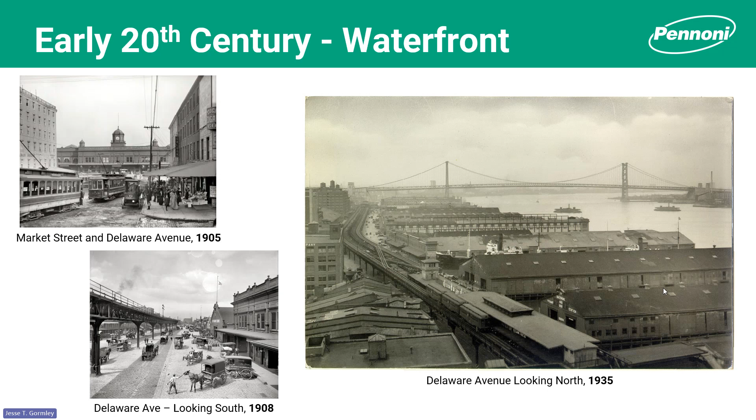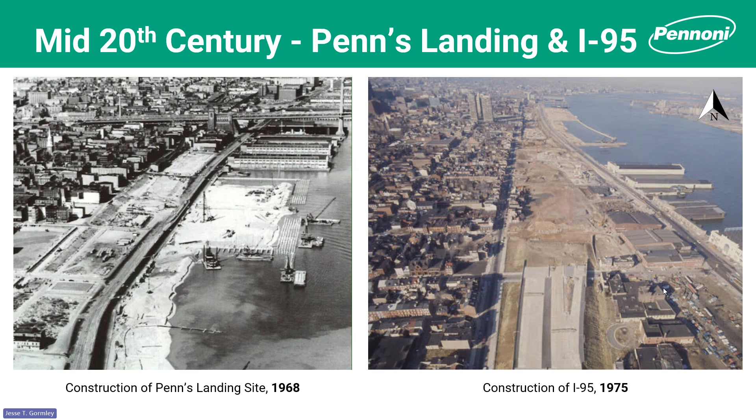Fast forward to what we're calling the existing condition. It's in quotes because the whole site on the left, the Penn's Landing many of us have known and loved for the last 50 years or so, is now demolished. Construction is underway for the new structures that we're going to be showing you. But we thought it was an important capture of the infrastructure that was out there.

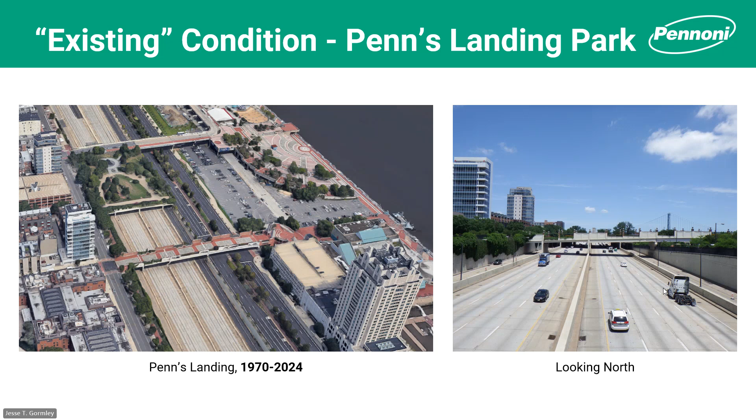And from here, we'll pivot to 2011. In the middle of that window, while the existing park spanned over 95, while there were some pedestrian bridges there, still there was a grander vision launched as the master plan for the Central Delaware to improve and develop this area, try to increase access and bring people back to the waterfront.

And the part I think is most impressive about this whole thing is the stick-to-itiveness that has gone with this vision. You see 4 elements called out here that were addressed as part of the I-95 CAP project. We're going to focus on that one highlighted in green, the Penn's Landing Park, today. But the fact that a plan developed nearly 15 years ago is actually coming to reality now, I think is highly impressive.

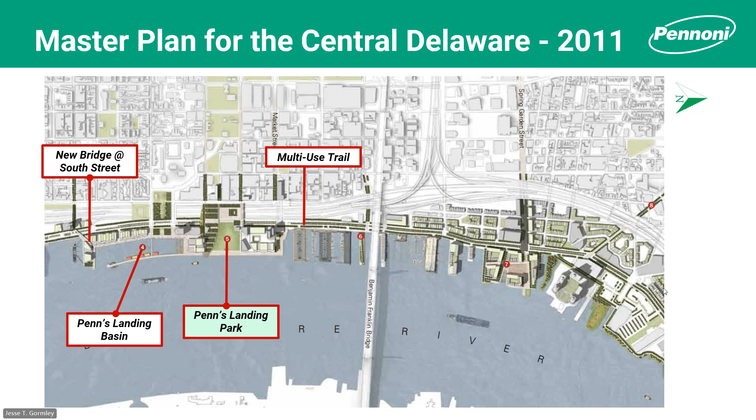In terms of project goals, there were many, and you see the long form version of them here. I bolded the ones that we're going to address most directly with the presentation today. Numbers 5 and 6 really focus on the South Street pedestrian bridge, which I will show a photo of. I'm hoping you will get to see other presentations on that in the future, but it won't be a focal point of today's presentation.

And the goals for us revolved around increasing access to the waterfront from the city, doing that by creating an inviting, open public space with landscaping that would bring people and make them want to come in to the new park space, as well as improve the visual connection to the river from Front Street. And I'll show you a graphic in a minute clarifying that one. And that last goal on the bottom was something that everybody carried throughout all the work we did. We wanted to be sure we were considering flexibility for future development and improvement in this area, both along 95 and along the Christopher Columbus Boulevard stretch.

Oh, before I move on from this, the figure on the right comes out of PennDOT's Publication 10A. I'm sure many of you are familiar with it, but we've been flashing this on screen when we get a chance because it's a great representation of what that community involvement process is supposed to be like through both planning as well as engineering and even into construction. And again, the project team is very proud of the level of input we were able to get, the community involvement that we had.

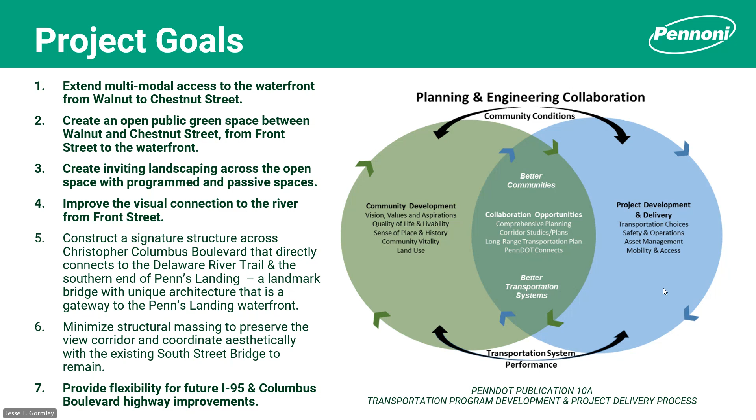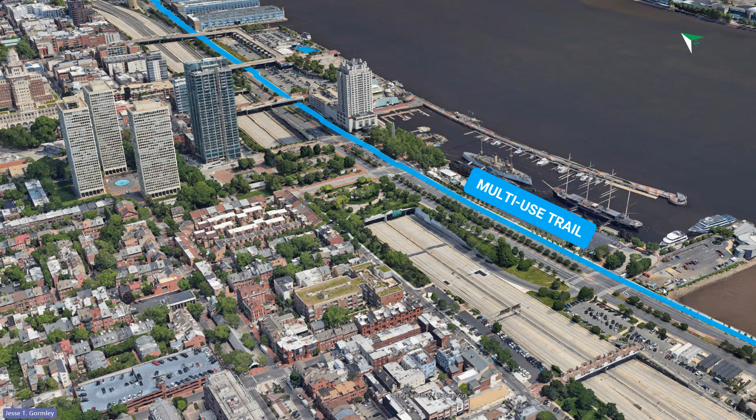All right, to provide another overview, here's an aerial of that project site I showed boxed out earlier. I mentioned there's a multi-use trail passing along the edge of the Delaware. That is the Delaware River Trail. I'm going to give a shout out to NV5, who really led the design on that element. Much of it is constructed, but the tie-ins to some of the new infrastructure going in, the South Street Bridge and the new cap structure bridge, are yet to be completed.

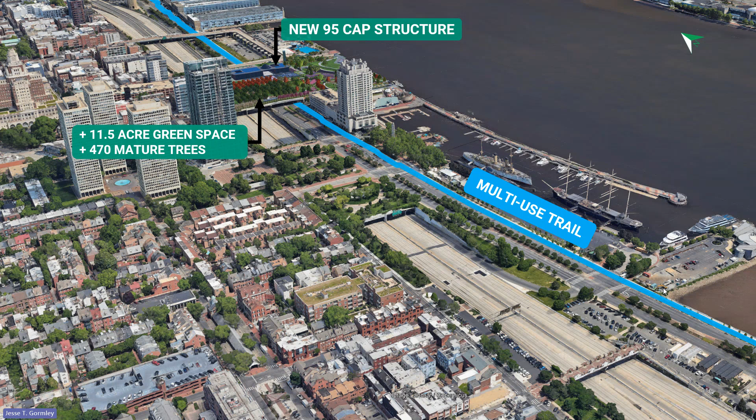Obviously, our focal point for today, the new I-95 cap bridge and other structures. That's what we focused on in this presentation, but it is the largest aspect of the project, I think. It was because it is the focal point around a lot of this other work. 11.5 acres of total green space, 470 mature trees going on top. It's a large structure.

I also mentioned the South Street Bridge. I'll show another rendering of this in a moment because it's a beautiful structure, proposed to serve as a gateway to the whole area. And then several other aspects of the project, not really represented in this graphic, but as mentioned, access was key. So we're extending multimodal access to the river through the park space, but also through coordination with SEPTA and what transit routes they have leading to this area, coordinating with the city for the bicycle network, being sure there's other opportunities to get here.

Streetscape and traffic calming measures taken especially along Front Street, again, to try to create an inviting access front door to the park, if you will. Traffic signal enhancements throughout, especially along Columbus Boulevard, and then improvements in traffic management system ITS work along I-95.

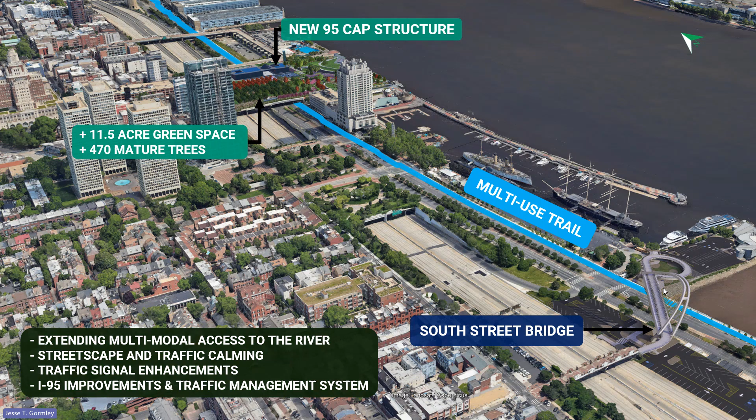Here's that rendering of the South Street Bridge, a really, really cool asymmetric tied arch structure. WSP led design for this, a great teammate, and I'm optimistic, like I said, that you'll get other presentations by them on this structure in the near future.

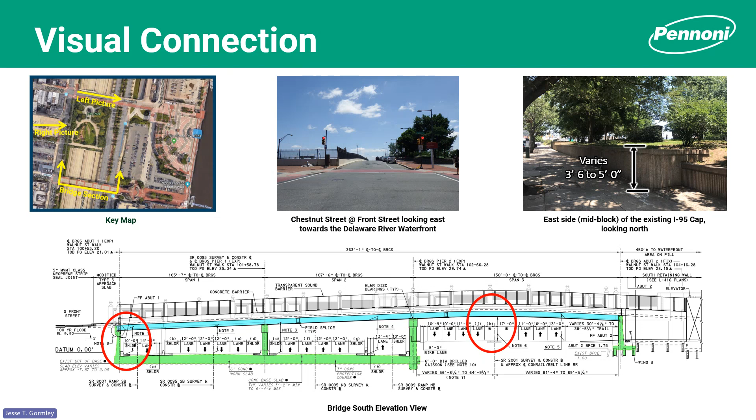Down bottom is a cross section of the bridge. It's actually the south elevation, and you can see 2 red circles. Those were vertical clearance controlling points for us. Obviously, there's some challenge in both restoring that visual connection, trying to keep the bridge profile low, while also meeting those vertical clearance requirements. But I think we rose to the challenge. Again, John will tell you more about the superstructure and how that design went.

Good. So I'm going to focus on the bridge structure, the components, basically all the stuff that you can't see when you're on that beautiful landscape structure, but all the stuff that we as engineers appreciate.

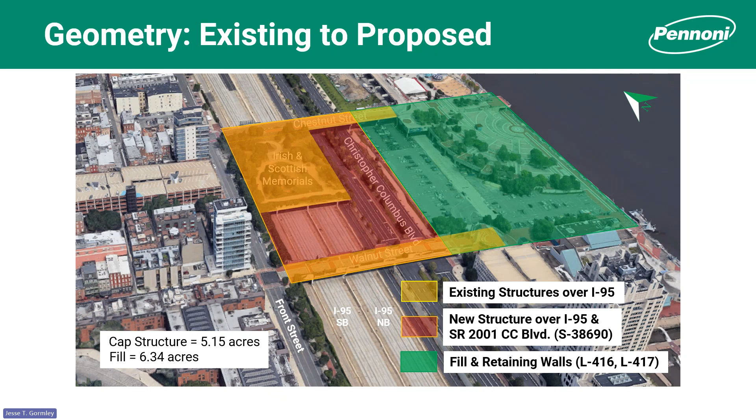Again, this is comparing existing to proposed cross sections. The wide portion of the existing structure was a park and also Chestnut Street, approximately 374 feet. And then there was another pedestrian bridge, Walnut Walk. All that coming out and now being one continuous 614-foot wide structure consisting of steel I-girders. I'll get more into the specifics of that later.

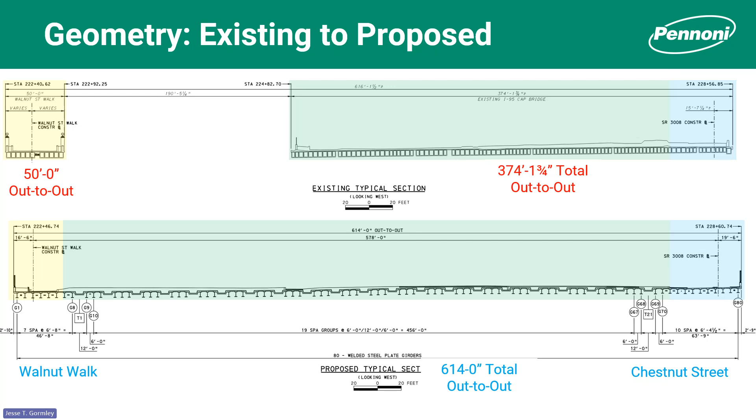Again, another comparison between existing and proposed structures. You see here the existing box girder bridge with 4 spans altogether over I-95, but not over Delaware Avenue. The new structure is going to extend over Delaware Ave, which is now Columbus Boulevard. So it was 209.5 feet previously, and now approximately 363 feet long.

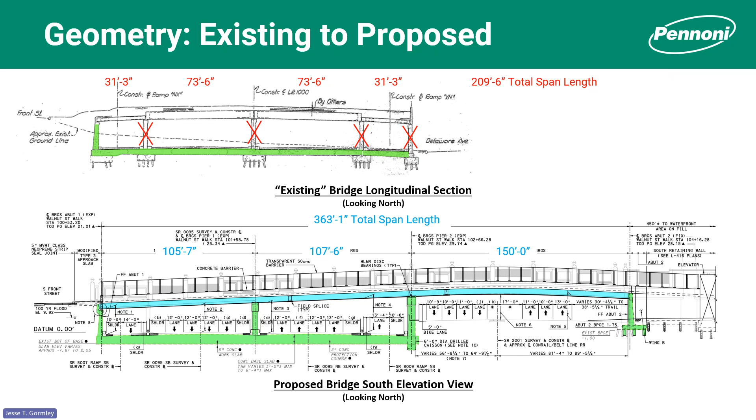These piers and abutment / pier, if you want to call it that, are all coming out. And the base slab here and abutment 1 are going to remain, whereas abutment 1 will be modified. So eliminating the 2 piers in the middle helped with lane arrangements for I-95. The existing base slab, which was a very thick concrete slab underneath I-95, was preserved as much as possible in building this new structure. And also, we found that there were some existing unknown foundations underneath all of that too, as we progressed drilling operations.

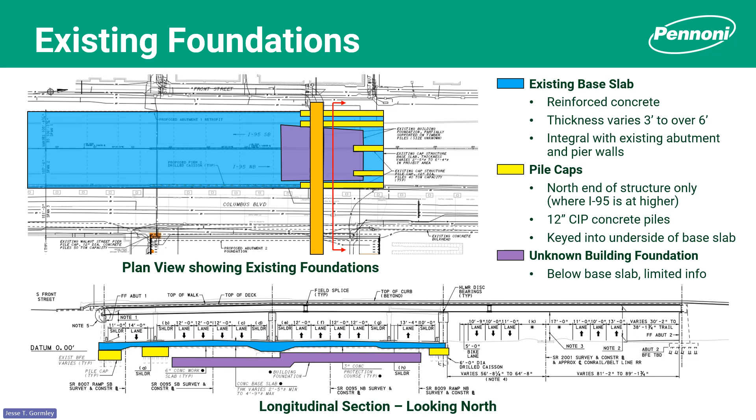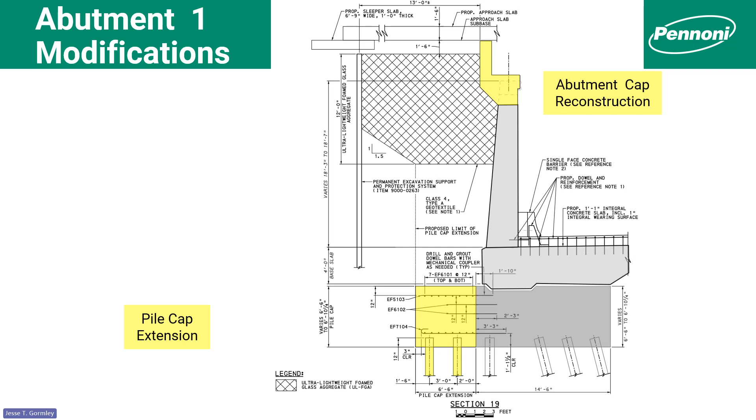So the interesting thing here, abutment 1 was retained as much as possible and remained connected to the base slab, and that's shown in light gray here. And underneath that was a pile cap in dark gray. But in order to reuse the existing abutment, we had to modify it. So one of the things we had to do was a pile cap extension to help resist the loads because the piles were overstressed. Additionally, we had to remove a portion of the top of this abutment and modify it to accept the new steel I-girders.

And behind that, to help reduce lateral loading, we used ultra lightweight foamed glass aggregate, otherwise known as UL-FGA. And this helped with overturning forces. And additionally, base slab strengthening as well to help with the overstressed base slab, which acted as a footing for the abutment. WSP helped us finish this design and detail it. So many thanks to them for that.

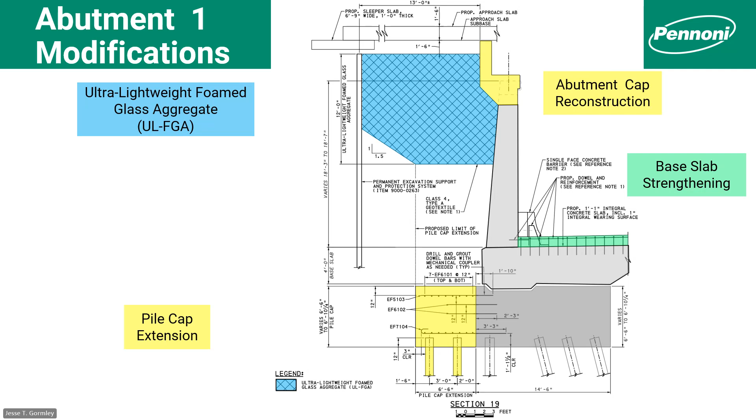This is a view of the top of the abutment at abutment 1 here, and how much we had to remove. And you can see a portion of the box girder bridge there that had to come out. And in comparing what we had to remove with what had to go in, you can see how we had to dowel into the existing structure. And this was all permitted because we wanted to make sure the dowels were never in tension and there was enough compressive force on there to accomplish that.

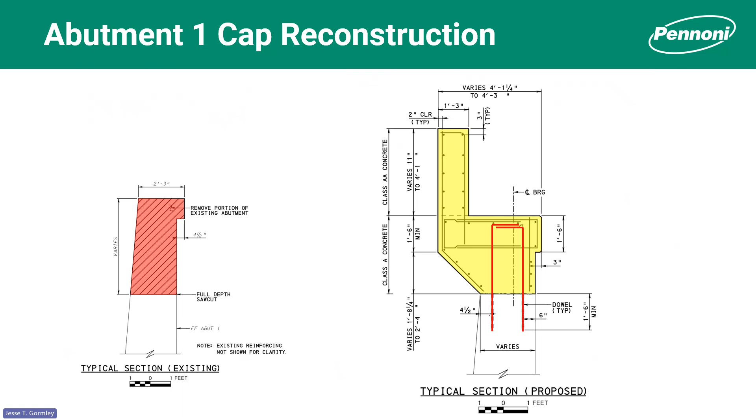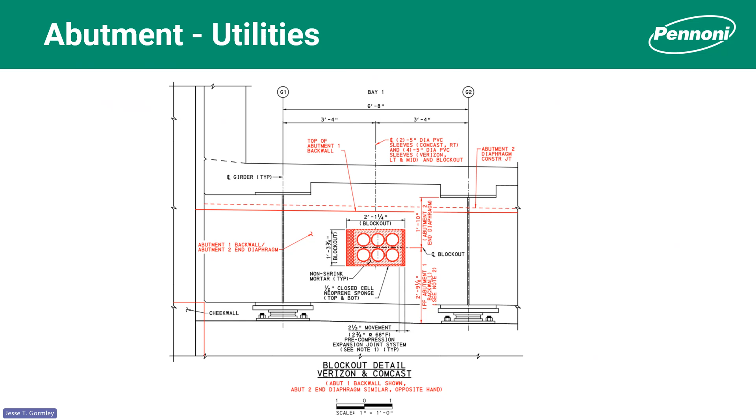So what I was trying to show here is how, as the structure moved back and forth, the ducts stay still, and there was neoprene sponge and a pre-compression expansion joint system on either side of the ductwork to get that to work. This is something similar that we used on the Vine Street Expressway bridges, if you're familiar with that project.

Another view of the ductwork passing through the diaphragm and a back wall and underneath an approach slab, which is all like threading the needle on this one.

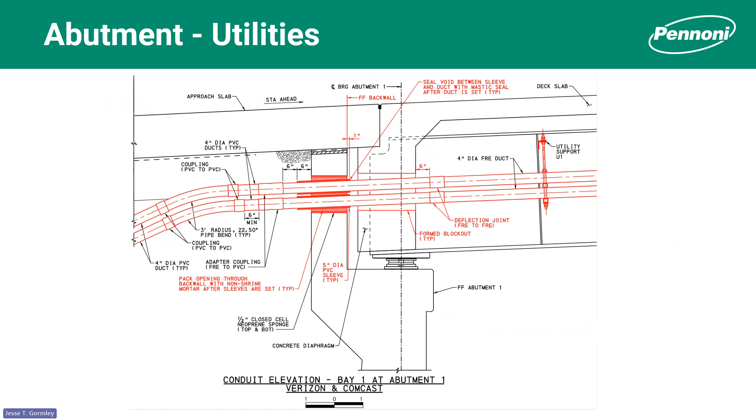And not just ductwork, but there was also drainage from the troughs that were on the bridge. All the landscaping had to have drainage underneath, and this had to penetrate through the back of the back wall, and this was tricky because, again, we had lateral movement in addition to longitudinal movement on the bridge. So it turned out to be quite a detailing nightmare to try to get this to work, to say the least.

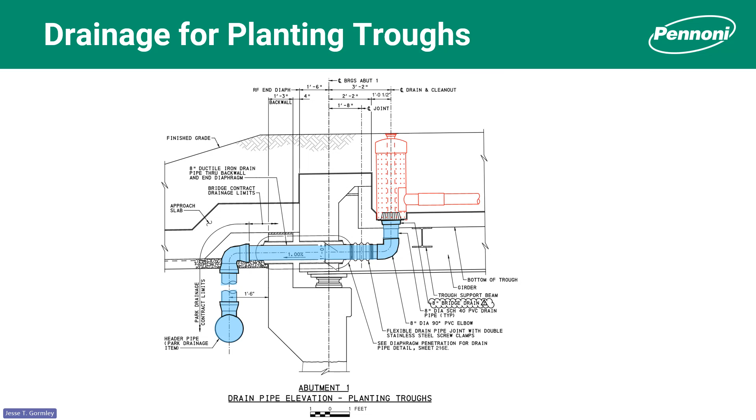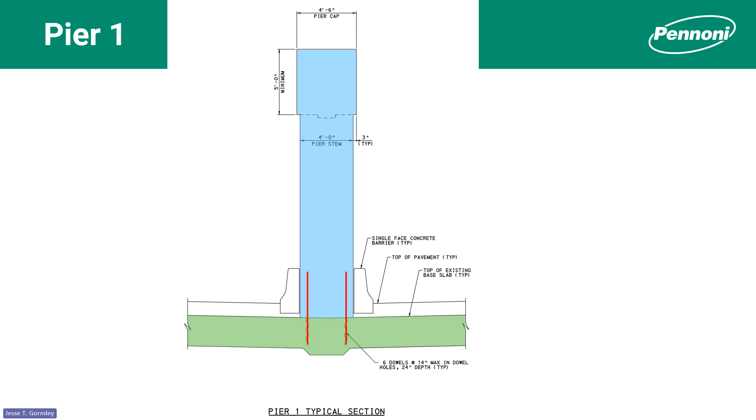Pier 1 on the structure was replaced. The original pier was also tied in to the base slab, which served as a footing. We wanted to do the same here with minimal intrusion on the base slab. So we managed to build a new pier on top of the base slab by doweling it in. However, we had to check for all load cases that the dowels were never in tension, and there was enough dead load to overcome any kind of overturning forces that may have been seen. So this helped reduce cost.

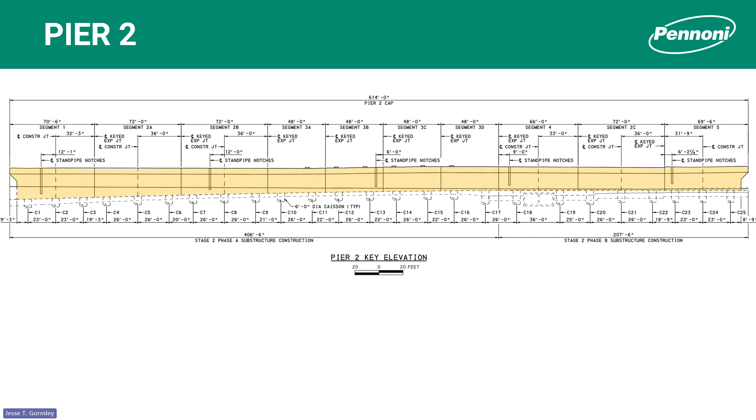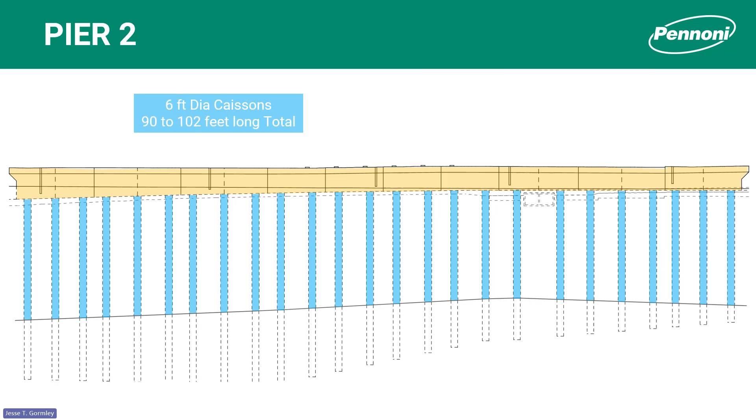At Pier 2, the base slab pretty much ended, and we had to support foundations of some sort. So working with Aegis, our geotechnical engineer, we determined that 6-foot diameter caissons would be the way to go on this. They were pretty deep. They averaged 90 to 102 feet just to get to the top of competent rock.

But then we also check the structure for the design live loads that PennDOT requires us to check, as well as emergency vehicles. And then the Chestnut Street Bridge was treated as a regular highway structure with all applicable live loads and pedestrian loads as well.

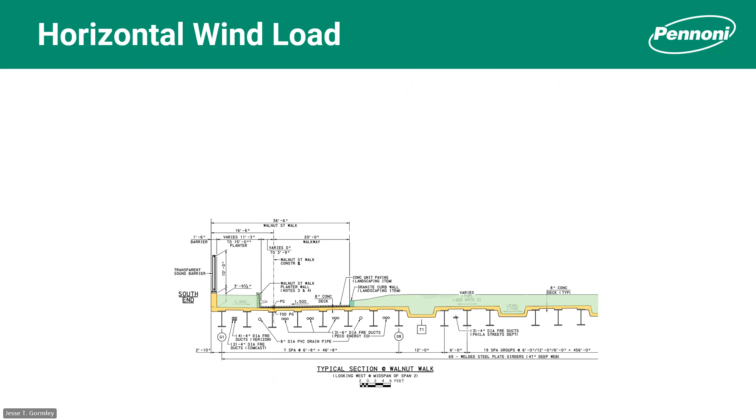Now, since this was a park bridge and the intent was to plant trees on it, which is what the troughs served, we had to accommodate those trees, and trees grow over time. And we assumed that the trees would extend 50 feet above the sound barriers. So then we had to consider all the wind load that was being applied, not just to the edge of the barriers, but to the trees as well, which then would get transferred to the bearings. So that was one of the interesting aspects with loading that we had to take care of on this bridge.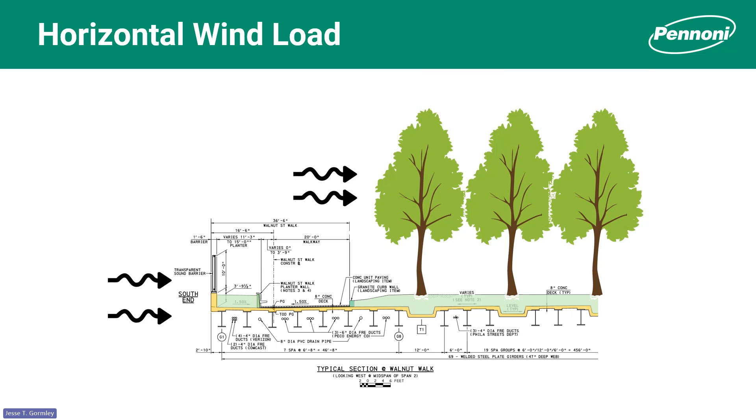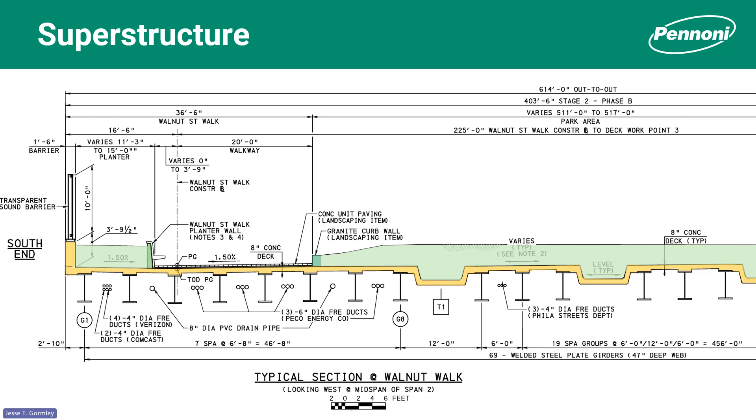Now, the troughs did not contribute to the structural capacity of the bridge in our design. We relied solely on the 3 girder groups that you see. So between each trough are 3 girders.

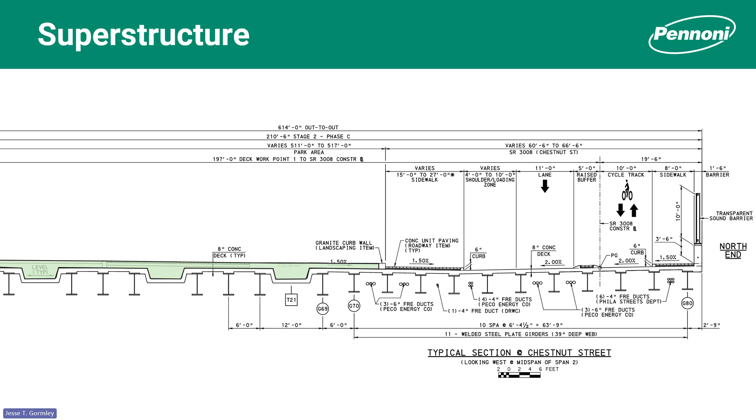These girders were mostly 47 inches deep, 50 KSI steel. The girders on Chestnut Street had to be a little smaller, with 39-inch deep webs.

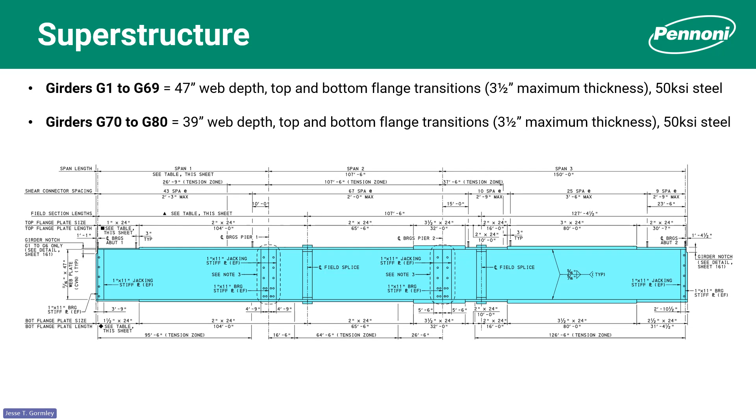STLRFD was used to design all the girders, and this was a conservative method of analysis. We also did a 3D model to more accurately model the deflection of the bridge to get camber. An additional model was done just to design the troughs, and we got a lot of help from WSP for designing the troughs.

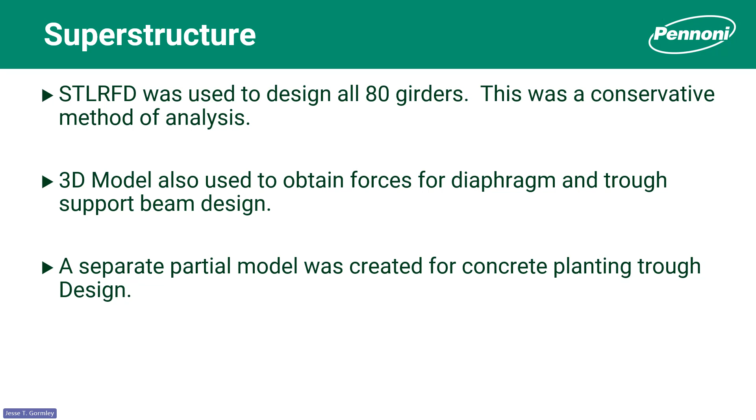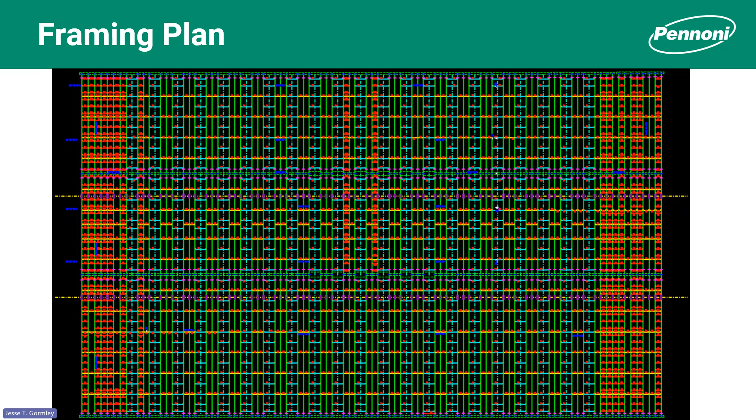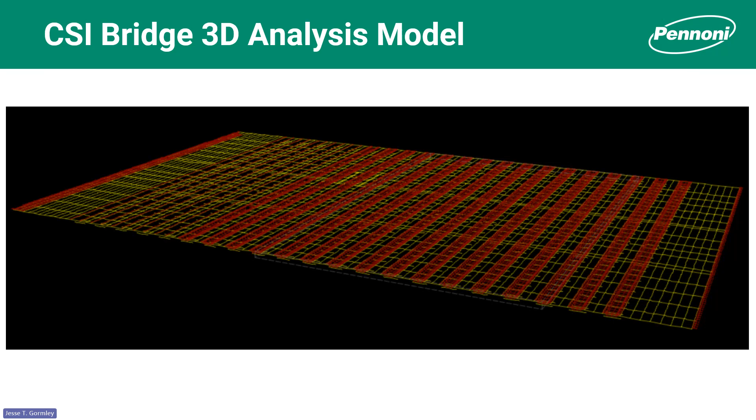The CSI bridge software was used to model the structure, and again it was a very large model. It took a day or two to run to get results, so it was time consuming to do iterations, to say the least. This is one of the reasons why we created a truncated model just to design the troughs.

As I said previously, the main CSI bridge model was used to determine deflections accurately to properly camber the girders. We also used a 3D model for designing diaphragms, and I'll get more into this a little bit.

The girder camber was interesting since this was not a symmetric structure, but had an unbalanced span arrangement, which created an upward camber in the center span. I'm not used to seeing something like this, but this is what happened on this bridge, especially with all the heavy landscaping loading.

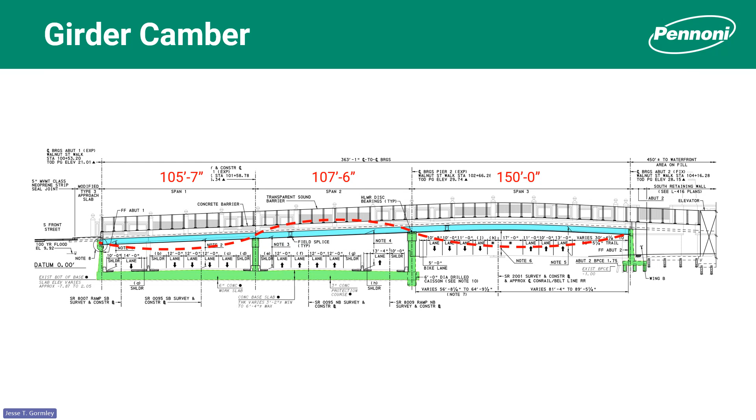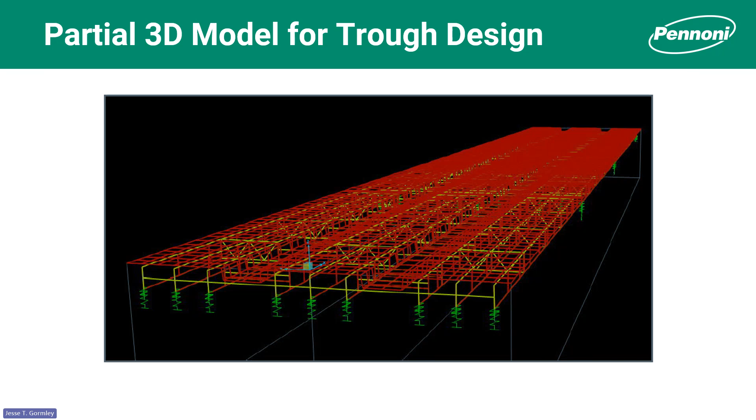Getting into the framing plan more, we initially tried to use the standards that show common K braces for bridges, but from the 3D model we discovered there's a lot of imbalanced loading, and the diaphragms were seeing much higher loads than anticipated.

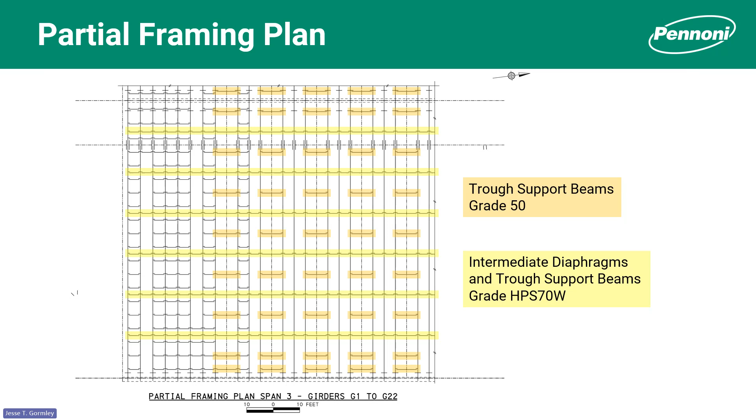In the tan color here, we're showing trough support beams because they were in between the main diaphragm lines in yellow. The loads imparted on these diaphragms were so high that we ended up using HPS 70W steel on them. There were many different types of diaphragms.

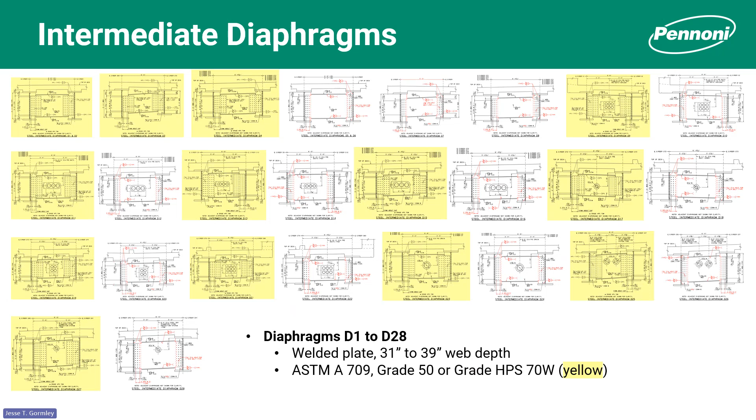We did a lot of diaphragm detailing here to accommodate utilities. All the ones in yellow were using HPS 70W steel, but not all the diaphragms used HPS 70W. Some of them in the center span we kept as grade 50, and this is what a typical plate diaphragm looked like there.

However, for those areas where the stresses were so high, we ended up using HPS 70W. The reason is that as we tried to design these diaphragms for loads, every time we increased the diaphragm to accommodate loads, we'd run the model and the extra stiffness would attract more load. It became a vicious cycle. So to break that cycle, using a higher grade of steel allowed us to maintain the stiffness as it was. Basically, the stiffness wasn't increased, only the strength increased, so we didn't attract more load by doing this.

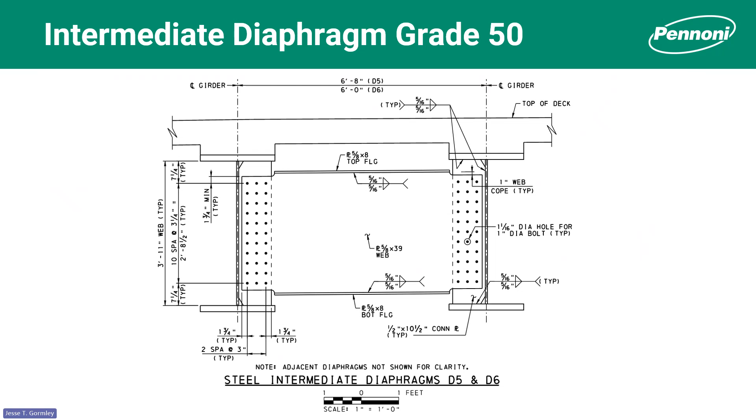But we still ended up having a beefier connection than just using the grade 50 steel, where these were just attached to one side of a stiffener. These needed plates on either side of the stiffener, so they were in double shear, because of how much load we had from unbalanced loading from the surface.

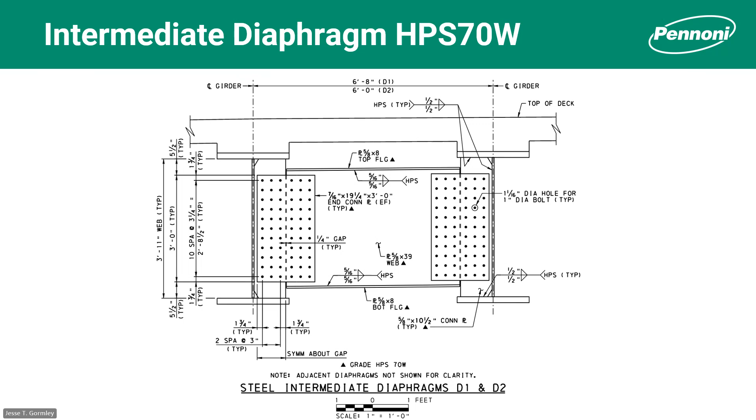Again, these are the trough support beams under each trough. They were attached with shear studs to the troughs. The top one shows a grade 50 steel trough support beam, while the bottom one has a more beefier connection, using the HPS 70W.

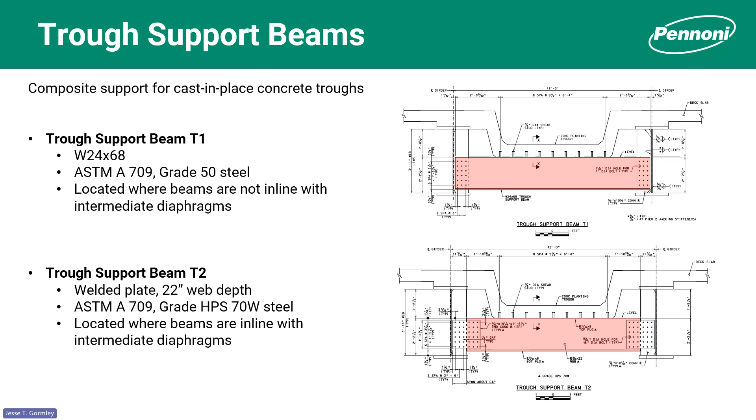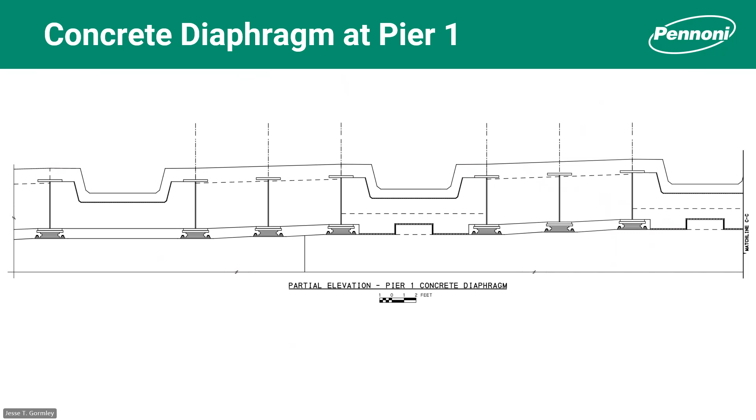What you see in the middle there is a shear block. We ended up using UHPC for those shear blocks to resist forces. One of the main reasons for that is because we couldn't develop the reinforcement in that short height. UHPC allowed us to get the development that we needed to resist lateral forces.

Additionally, we needed to use UHPC in the diaphragm end because, again, we were having problems getting the proper development length for reinforcement to resist shear. And the design used the method of shear friction.

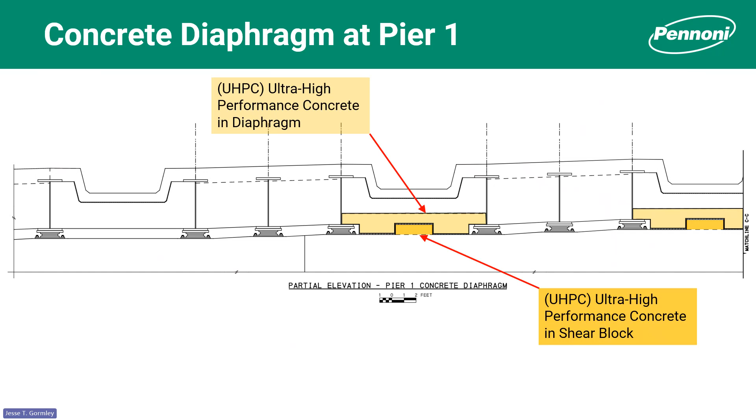Additionally, we were finding that we needed to use a lot of reinforcement in these very shallow diaphragms. And some of the diaphragms were seeing tension because of the resistance of the shear blocks as the bridge was trying to expand and contract.

So the reinforcement that we used was uncoated corrosion-resistant reinforcement, which was a higher strength, I think also known as MMFX steel in the industry.

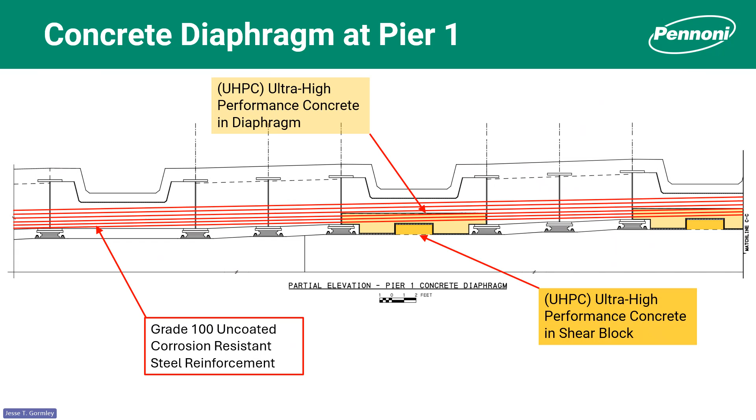And this is my final slide. This is showing a bearing orientation plan. There were 6 shear blocks for each substructure unit to resist lateral loads.

The bearings themselves did not resist lateral loads. The fixed bearing line at abutment 2 were transversely guided, so they only resisted longitudinal forces. All other bearings were non-guided bearings, which allowed expansion in any direction. And this allowed the bridge to move basically from the center out.

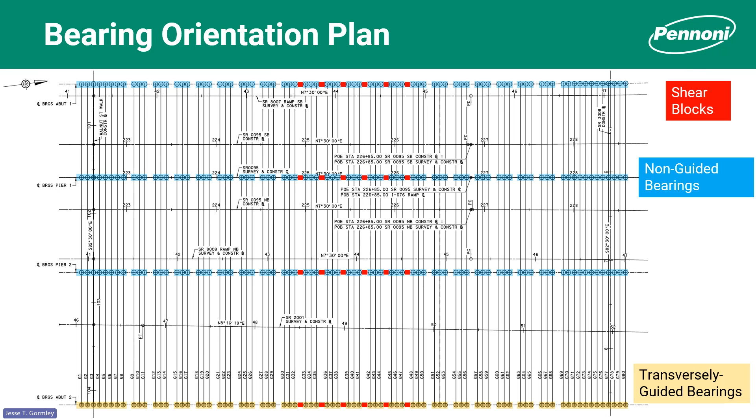And I'm going to hand it over to Julie.

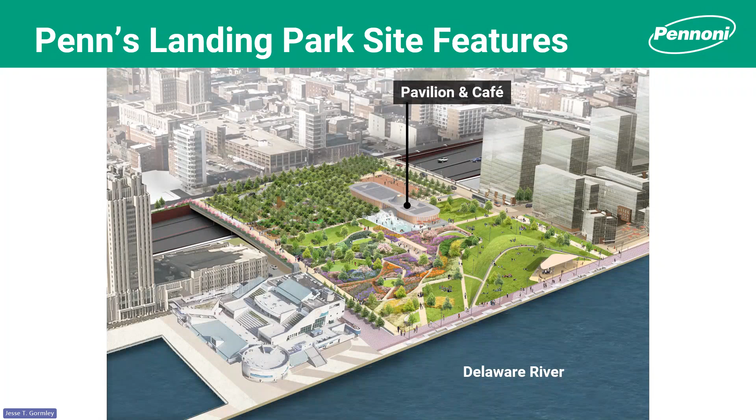Thanks, John. Sure. So I'm going to reorient us up to the top side of the park, specifically the pavilion and cafe that I'm going to touch on today.

Here we have a section through the bridge at the pavilion and the cafe building. The pavilion is the one-story building that sits on top of the bridge. This is a mass timber building using glue laminated columns and beams, and then cross-laminated timber CLT decking. Adjacent to that and the bridge is the cafe, which has 2 stories below grade and then 1 level above.

The level above grade is the same mass timber construction as the pavilion, and below grade we use composite steel construction. And then connecting these 2 elements is a breezeway canopy.

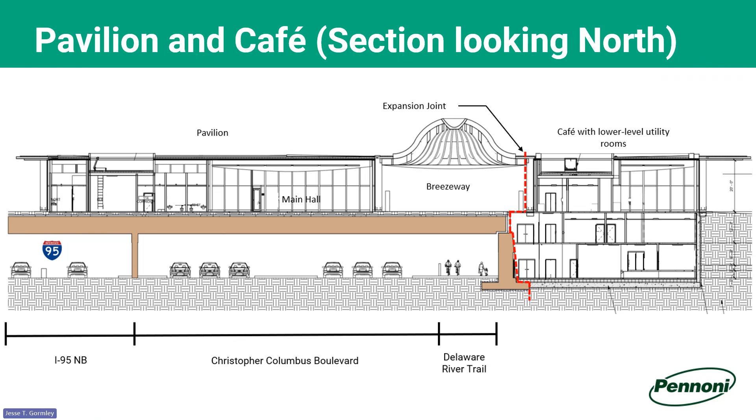The design and construction of the building and most of the elements on top of the park itself, or the bridge itself, were under a different contract than the bridge construction and will be constructed by a different contractor. So because of this, the building design was on a different schedule than the bridge and lagged the bridge construction. So we started much of our design once the bridge design was well underway.

Here we have a 3D section to show another perspective of how the buildings interface with the bridge and how they all interact with one another.

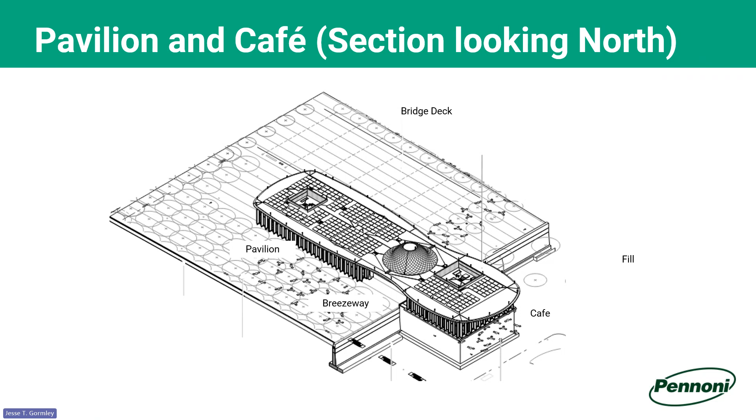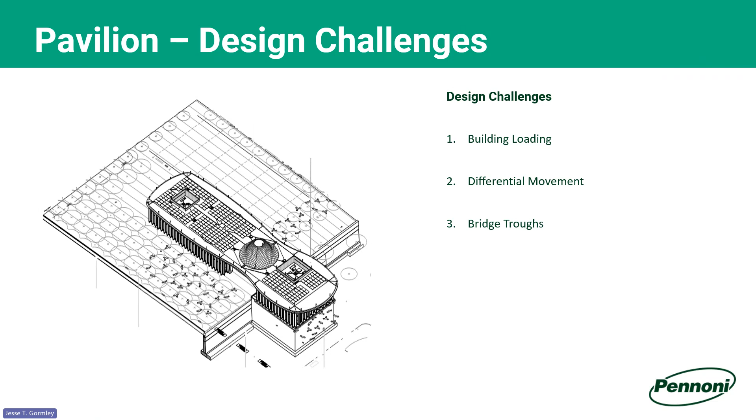Since the buildings are on and adjacent to the bridge, we definitely had some design challenges that weren't common to typical building design. Today, I'm just going to touch on a few of them, specifically related to the pavilion, the one-story building that sat directly on the bridge. And those are building loading, differential movement, and then the bridge troughs that John touched on.

So design challenge number one was the building loading itself. So the bridge was essentially, for all intents and purposes, a podium slab for us that our pavilion structure was supported off of. This isn't really anything new.

However, the challenge really lied in the communication and coordination between my team and the bridge designers. Since one engineer wasn't really responsible for the total design, any little loading change had to be coordinated back through all the teams and all the different models to make sure we didn't have an issue.

This coordination was even more of a challenge because, as I mentioned, the bridge design began work way in advance of the building. So loading assumptions had to be made for what the building was going to weigh and how it was going to distribute load before work even began on developing the architecture around the building.

For this, the bridge team assumed a uniform load over the footprint of the pavilion, not localized loads at columns, which is how buildings generally impose their load onto a structure or columns below. Also, my understanding is they assumed it would be a steel structure, not a mass timber structure, which ultimately ended up being heavier than what was assumed originally.

So with all of these assumptions going into the design of the building, we had a lot of work to do working with the architects on what they wanted for the space, and then ultimately what the bridge could support. Architecturally, the space really wanted open spaces with as little columns as possible to allow for wide open events, specifically in the front of the building. However, to meet the loading criteria for the bridge, it really wanted the columns to be at 10 to 15 feet on center to allow for uniform loading.

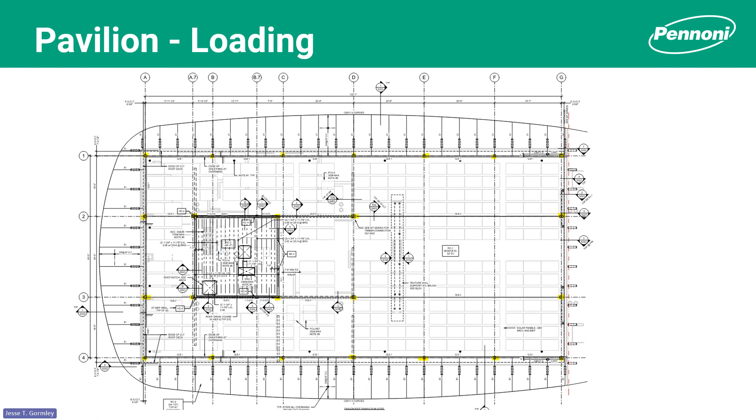The architects originally were pushing for the pavilion loading and the girders to run perpendicular to the bridge girders, which ultimately put all the load on only 2 of the bridge beams, which wasn't going to work. So there was a lot of back and forth throughout this process where we would propose a column grid, the bridge team would run the analysis, let us know if it was going to work, and then we would go back to the drawing board and adapt and adjust as needed.

Ultimately, we ended up with a design that worked, but there was a lot of gymnastics to get us there. So much so that towards the end of the design, we were finalizing solar on the roof of the pavilion, and we were basically told by the bridge team that there was no more additional capacity, even though it weighed maybe 3 PSF more than what we had originally designed into the building. Ultimately, we were able to get the solar to work by doing a very detailed takeoff of every single dead load on this building to justify it all. But that's how tight the design was once we were done.

Moving into the second design challenge is differential movement. First, I'll start with lateral movement. As John had discussed, the bridge is moving at its own rate, back and forth based on lateral loads.

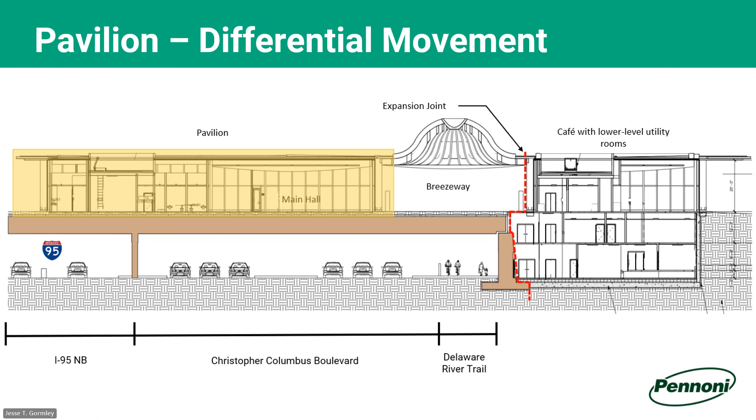Here's another image of that expansion joint at the interface of the cafe. Laterally, we took all the load from the breezeway and we dragged it back into the pavilion building, and we used shear walls to support the lateral system, supporting it back down to the bridge, which, again, was another load that they had to consider into the design, along with the trees.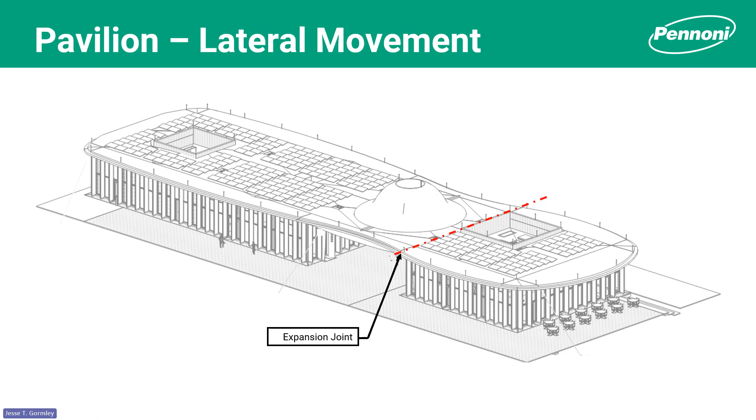Another design consideration was gravity load deflection. Since we are on a bridge, and it's basically just a podium structure, checking for gravity deflections isn't really a new concept, but something we're not used to dealing with on a typical basis is the camber design that the bridge designs into its girders, and understanding how that movement is going to affect the different components in the pavilion. Also, how adding different components throughout construction is going to affect how the building reacts.

So in order to study this, the bridge group provided us deflection output for basically every single load case. Down to every detail of, we added the soil and here are the deflections, and we added the pavers and here's the deflections. We did a pretty big study to try to understand how every part of the building was going to move in relationship to the bridge. The bridge live load itself, coming from a building engineer, is pretty stringent at L over 1,000. So luckily we weren't looking at very large deflections for live load, over 100-foot long bridge spans.

Some of the specific conditions for the gravity load that we were concerned about was the facade for the pavilion. This was a panelized wood curtain wall system. Luckily, the curtain wall system itself was panelized in 5-foot segments, which did allow for some more movement between jointing, but we did have to detail the slip connection at the top to accommodate all the differential movement across the pavilion, and to ensure that we don't have any cracking once the thing gets built.

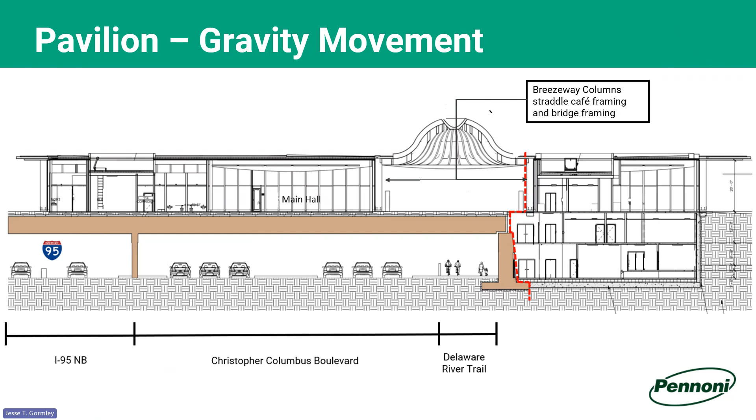And then the last item that I'm going to touch on today for the design challenges of the pavilion are the bridge troughs themselves that John had discussed. So part of the genius of using these bridge troughs was they did reduce the total amount of load that was imposed on the bridge, because as John had mentioned, we have 100-foot, 50-foot tall trees that are going to be planted on this bridge. And as you can imagine, they need a good bit of soil to make the root system work. So instead of building up that much soil on the entire bridge, these trees were put into the troughs so that there was more soil in those areas than the rest of the bridge.

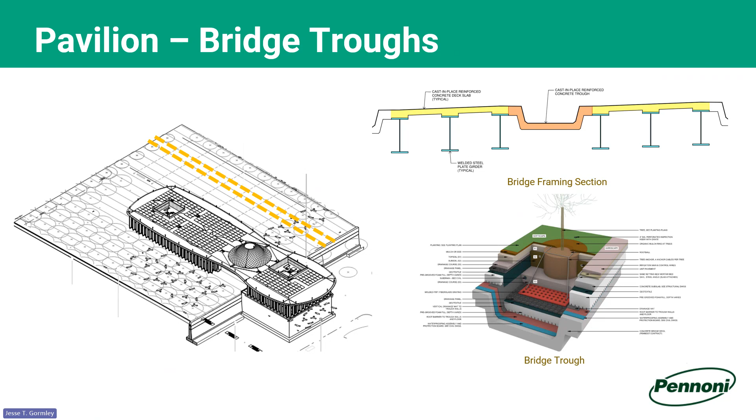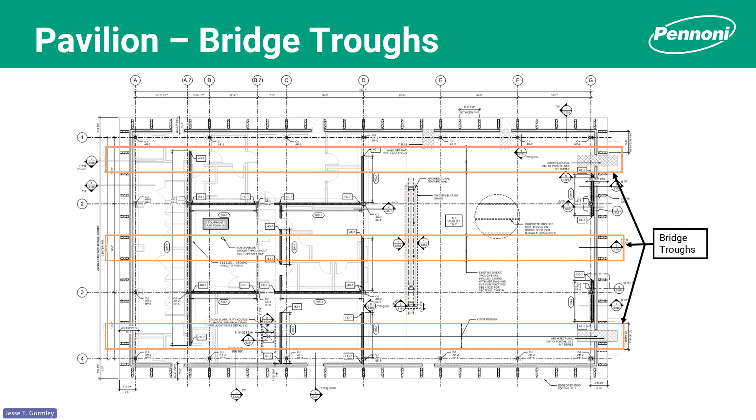And as you can see on this image, the orange denotes one of these bridge troughs, which were at 7 feet on center. How close were they? 12 feet on center. So here's an image of the pavilion ground floor slab with those bridge troughs shown. One of the challenges we had, though, with these bridge troughs was that we couldn't impose any load onto them from our building, because we had utilities running underneath the building and then back into the park structures on the bridge. So we had to design everything to span over top of them, and we had to avoid putting any columns in these locations because they didn't want to take any loads. That was a challenge we had to deal with.

I didn't really touch on the park design, but here's an image of the bridge with the park overlaid onto it with all of these troughs highlighted in orange. And throughout the entire design of the park, nothing wanted to structurally put pressure onto these troughs. We had playgrounds, we had hardscaping, and all of these items were designed to span over the troughs. Not so much as the troughs couldn't support the load, but there was a concern that the pressure of items bearing on top of the soil within these troughs would cause the drainage and the irrigation to be cut off to the trees, resulting in them possibly dying. So there was a lot of gymnastics done on the top side to avoid basically putting any sort of structural loading onto these troughs and spanning everything over top.

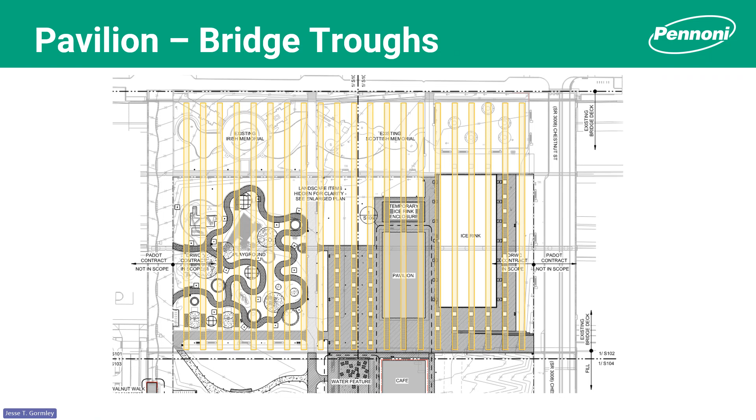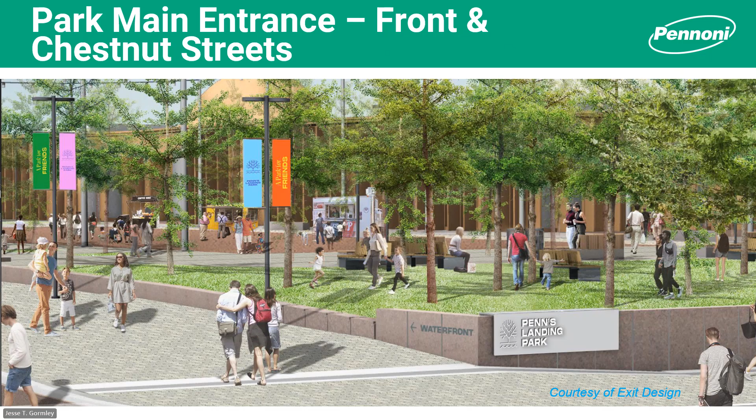So the first one, I saw that you had in the diaphragms looking at 70 KSI, and maybe I missed it, but was the 70 KSI investigated for the main beams to reduce any flange thickness? It was investigated early on, but everything was successfully accomplished using 50 KSI steel. So in the end, flange thicknesses didn't exceed what was industry standard.

Okay. Next question. What was assumed for the diaphragm connection to the girder? Was the connection assumed fully rigid, semi-rigid, and how was that modeled in CSI? So the diaphragm connections were assumed to take moment. So the diaphragms themselves are meant to be able to withstand moment and provide lateral bracing for the bottom flange. So we had to assume rigidity there.

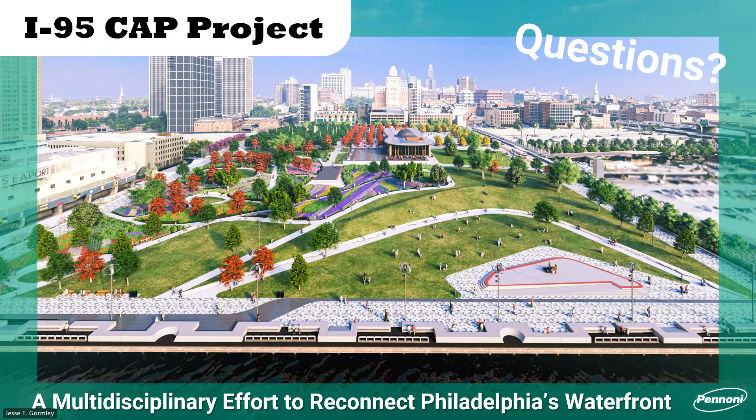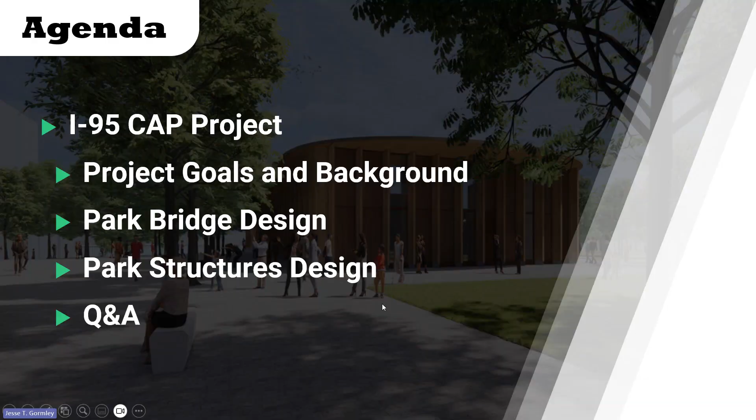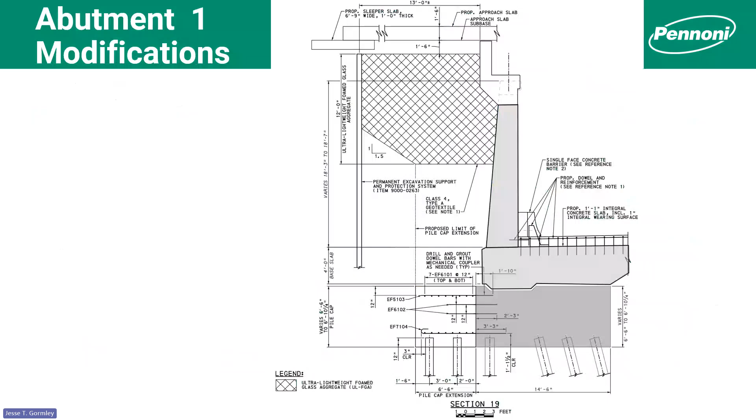I think I'll stop sharing if you want to jump back to that slide, if you wanted to share again. Yeah, let me see if I can get us back to it. We got to scroll way back. Let me restart. I'll just do it from the get-go because it was fairly early on. Apologies for the scroll time, everyone. It's the worst part, huh? I'm not sure what the UHPC on the design load table. I assume that was what we were looking at. There you go.

Oh, here, UHPC 160 load. I see. Well, I guess the question is, what is that loading? That's just the UHPC itself. Yes. Okay. I think we broke out the UHPC separate from the other. So these are the unit loads for it, right? I gotcha. For 0.150, that's your 150 PCF standard load for concrete on a bridge. The UHPC carried a higher unit weight, and that was just what was represented here. Okay, makes sense.

Next question is, what are the reasons for the different rock socket lengths for drilled shafts? Yeah, we peppered this site with borings. This is really a better question for our geotech sub Aegis, but the rock profile throughout here, as well as obstructions that we hit, as we went north, because we're, reminder, 600 plus feet wide here, the conditions varied a lot, especially along the waterfront.

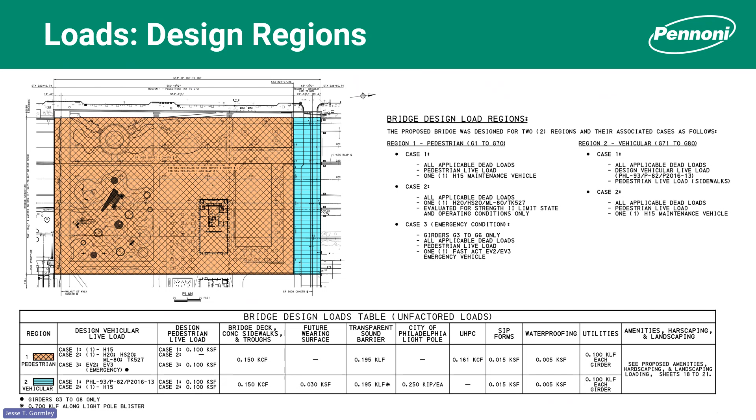There you go. What we were finding is at the south end. Yeah, okay. The box culvert there helps orient. At the south end, the rock profile was just deeper. And the difference between that case on the rock socket and some of the deeper rock socket lengths was because there was some weathered rock encountered at the surface for some layers.

Right. And last question here. Are the building foundations anchored to the deck or separate? Are the trees tied down to the deck, or were the troughs assumed to provide the support? So the pavilion itself is attached to the deck where we're using post-installed connections and essentially pouring like a strip footing around the pavilion that's being anchored.

As for the trees, I think there's a ballasted type system, and Jesse, maybe you can speak more to that, kind of ballasts it down to the troughs, but I don't think there's any mechanical anchorage between the two. There's a large anchor plate underneath the root ball. Yeah. But it wasn't physically attached to the trough. And it's not intended to be.

And not something we touched on in this presentation much, but we have a very robust waterproofing system spec'd for this, particularly in the troughs, to help prevent the roots deciding that they do want to be part of the trough in the future.